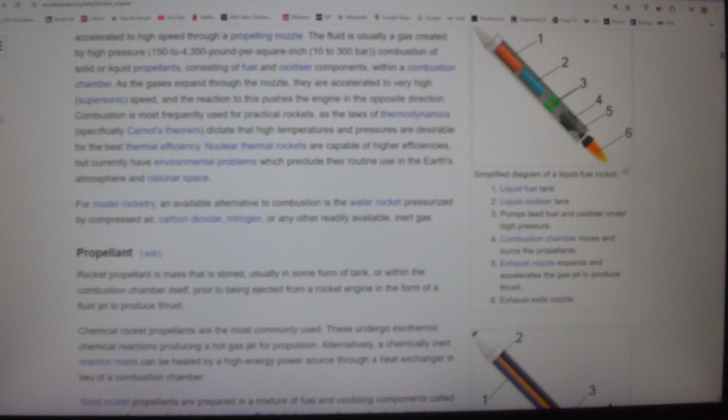Combustion is most frequently used for practical rockets, as the laws of thermodynamics, specifically Carnot's theorem, dictate that high temperatures and pressures are desirable for the best thermal efficiency. Nuclear thermal rockets are capable of higher efficiencies, but currently have environmental problems which preclude their routine use in the Earth's atmosphere and cislunar space. For model rocketry, an available alternative to combustion is the water rocket pressurized by compressed air, carbon dioxide, nitrogen, or any other readily available, inert gas.

Propellant. Rocket propellant is mass that is stored, usually in some form of tank, or within the combustion chamber itself, prior to being ejected from a rocket engine in the form of a fluid jet to produce thrust. Chemical rocket propellants are the most commonly used. These undergo exothermic chemical reactions producing a hot gas jet for propulsion. Alternatively, a chemically inert reaction mass can be heated by a high-energy power source through a heat exchanger in lieu of a combustion chamber.

Solid rocket propellants are prepared in a mixture of fuel and oxidizing components called grain, and the propellant storage casing effectively becomes the combustion chamber.

Injection. Liquid-fueled rockets force separate fuel and oxidizer components into the combustion chamber, where they mix and burn. Hybrid rocket engines use a combination of solid and liquid or gaseous propellants. Both liquid and hybrid rockets use injectors to introduce the propellant into the chamber.

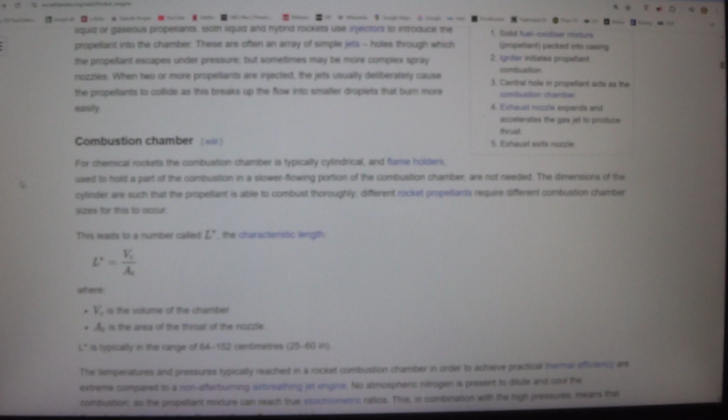Combustion chamber. For chemical rockets, the combustion chamber is typically cylindrical, and flame holders, used to hold a part of the combustion in a slower flowing portion of the combustion chamber, are not needed. The dimensions of the cylinder are such that the propellant is able to combust thoroughly. Different rocket propellants require different combustion chamber sizes for this to occur.

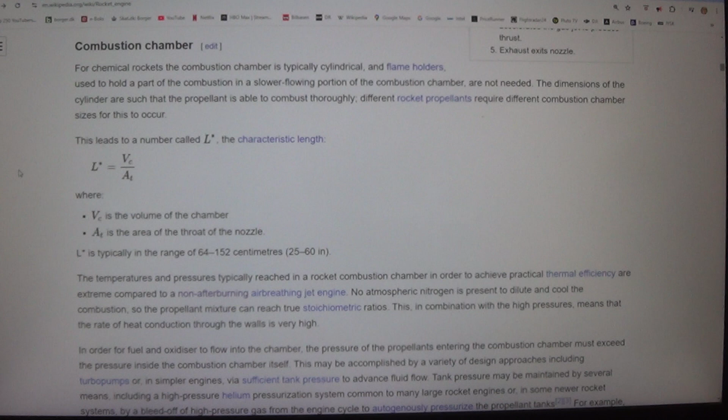This leads to a number called L*. The characteristic length L* = V_c / A_t, where V_c is the volume of the chamber and A_t is the area of the throat of the nozzle. L* is typically in the range of 64–152 centimeters (25–60 in).

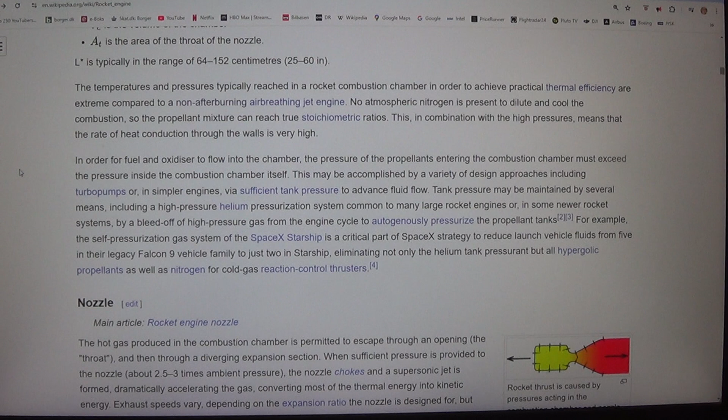The temperatures and pressures typically reached in a rocket combustion chamber in order to achieve practical thermal efficiency are extreme compared to a non-afterburning air-breathing jet engine. No atmospheric nitrogen is present to dilute and cool the combustion, so the propellant mixture can reach true stoichiometric ratios. This, in combination with the high pressures, means that the rate of heat conduction through the walls is very high.

In order for fuel and oxidizer to flow into the chamber, the pressure of the propellants entering the combustion chamber must exceed the pressure inside the combustion chamber itself. This may be accomplished by a variety of design approaches including turbo pumps or, in simpler engines, via sufficient tank pressure to advance fluid flow.

Tank pressure may be maintained by several means, including a high-pressure helium pressurization system common to many large rocket engines or, in some newer rocket systems, by a bleed-off of high-pressure gas from the engine cycle to autogenously pressurize the propellant tanks. For example, the self-pressurization gas system of the SpaceX Starship is a critical part of SpaceX's strategy to reduce launch vehicle fluids from 5 in their legacy Falcon 9 vehicle family to just 2 in Starship, eliminating not only the helium tank pressurant but all hypergolic propellants as well as nitrogen for cold gas reaction control thrusters.

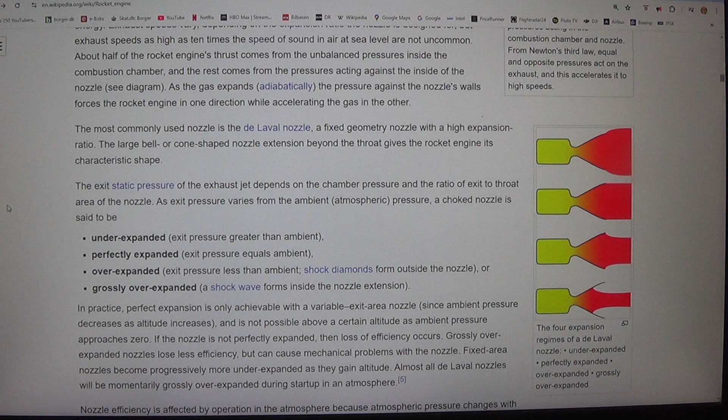The most commonly used nozzle is the de Laval nozzle, a fixed geometry nozzle with a high expansion ratio. The large bell or cone-shaped nozzle extension beyond the throat gives the rocket engine its characteristic shape. The exit static pressure of the exhaust jet depends on the chamber pressure and the ratio of exit to throat area of the nozzle.

As exit pressure varies from the ambient, atmospheric pressure, a choked nozzle is said to be: 1. Under-expanded, exit pressure greater than ambient. 2. Perfectly expanded, exit pressure equals ambient. 3. Over-expanded, exit pressure less than ambient, shock diamonds form outside the nozzle, or 4. Grossly over-expanded, a shock wave forms inside the nozzle extension.

In practice, perfect expansion is only achievable with a variable exit area nozzle, since ambient pressure decreases as altitude increases, and is not possible above a certain altitude as ambient pressure approaches zero. If the nozzle is not perfectly expanded, then loss of efficiency occurs.

Grossly over-expanded nozzles lose less efficiency, but can cause mechanical problems with the nozzle. Fixed area nozzles become progressively more under-expanded as they gain altitude. Almost all de Laval nozzles will be momentarily grossly over-expanded during startup in an atmosphere.

Nozzle efficiency is affected by operation in the atmosphere because atmospheric pressure changes with altitude, but due to the supersonic speeds of the gas exiting from a rocket engine, the pressure of the jet may be either below or above ambient, and equilibrium between the two is not reached at all altitudes. See diagram. Back pressure and optimal expansion.

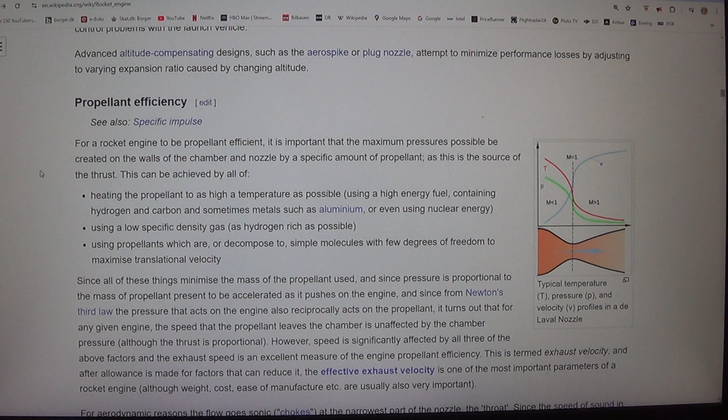Propellant efficiency. See also, specific impulse. For a rocket engine to be propellant efficient, it is important that the maximum pressures possible be created on the walls of the chamber and nozzle by a specific amount of propellant, as this is the source of the thrust. This can be achieved by all of:

1. Heating the propellant to as high a temperature as possible, using a high-energy fuel, containing hydrogen and carbon and sometimes metals such as aluminium, or even using nuclear energy. 2. Using a low specific density gas, as hydrogen-rich as possible. 3. Using propellants which are, or decompose to, simple molecules with few degrees of freedom to maximize translational velocity.

Since all of these things minimize the mass of the propellant used, and since pressure is proportional to the mass of propellant present to be accelerated as it pushes on the engine, and since from Newton's third law the pressure that acts on the engine also reciprocally acts on the propellant, it turns out that for any given engine, the speed that the propellant leaves the chamber is unaffected by the chamber pressure, although the thrust is proportional.

However, speed is significantly affected by all three of the above factors, and the exhaust speed is an excellent measure of the engine propellant efficiency. This is termed exhaust velocity, and after allowance is made for factors that can reduce it, the effective exhaust velocity is one of the most important parameters of a rocket engine, although weight, cost, ease of manufacture etc.

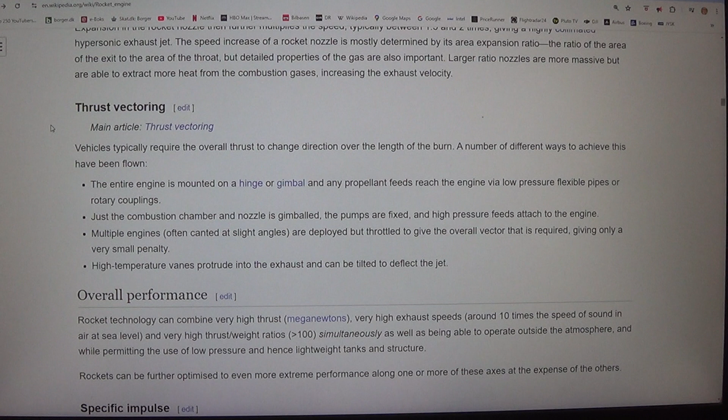1. The entire engine is mounted on a hinge or gimbal and any propellant feeds reach the engine via low-pressure flexible pipes or rotary couplings. 2. Just the combustion chamber and nozzle is gimballed, the pumps are fixed, and high-pressure feeds attached to the engine. 3. Multiple engines, often canted at slight angles, are deployed but throttled to give the overall vector that is required, giving only a very small penalty. 4. High-temperature vanes protrude into the exhaust and can be tilted to deflect the jet.

Overall performance. Rocket technology can combine very high thrust, meganewtons, very high exhaust speeds, around 10 times the speed of sound in air at sea level, and very high thrust/weight ratios, greater than 100, simultaneously, as well as being able to operate outside the atmosphere, and while permitting the use of low pressure and hence lightweight tanks and structure. Rockets can be further optimized to even more extreme performance along one or more of these axes at the expense of the others.

Specific impulse. Main article: specific impulse. The most important metric for the efficiency of a rocket engine is impulse per unit of propellant. This is called specific impulse, usually written I_sp. This is either measured as a speed, the effective exhaust velocity, v_e, in meters/second or feet/s, or as a time, seconds. For example, if an engine producing 100 pounds of thrust runs for 320 seconds and burns 100 pounds of propellant, then the specific impulse is 320 seconds.

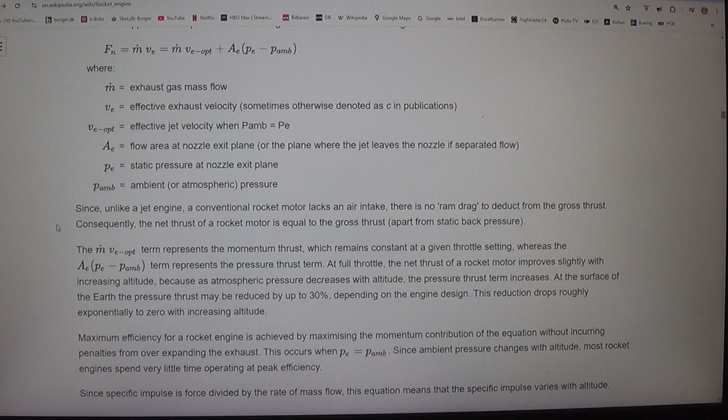F_n = ṁ v_e = ṁ v_e-opt + A_e (p_e − p_amb), where ṁ = exhaust gas mass flow, v_e = effective exhaust velocity, sometimes otherwise denoted as c in publications, v_e-opt = effective jet velocity when p_amb = p_e, A_e = flow area at nozzle exit plane, or the plane where the jet leaves the nozzle if separated flow, p_e = static pressure at nozzle exit plane, p_amb = ambient, or atmospheric, pressure.

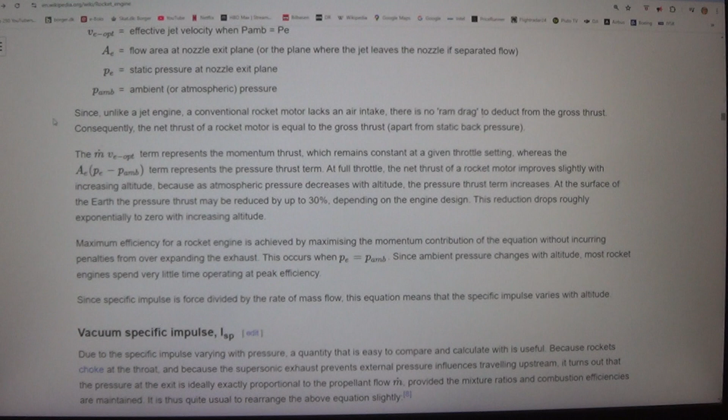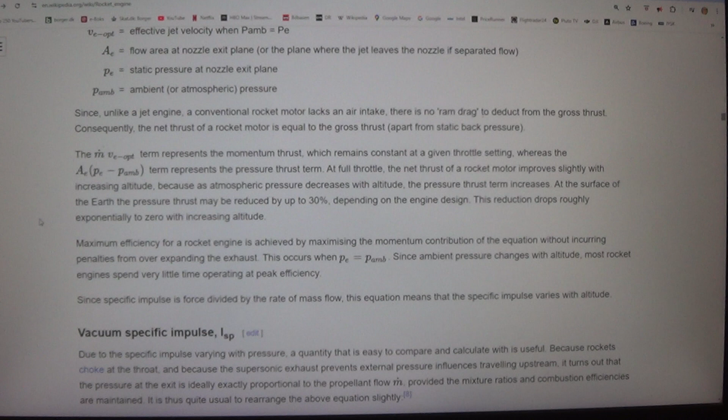Since, unlike a jet engine, a conventional rocket motor lacks an air intake, there is no ram drag to deduct from the gross thrust. Consequently, the net thrust of the rocket motor is equal to the gross thrust, apart from static back pressure. The ṁ v_e-opt term represents the momentum thrust, which remains constant at a given throttle setting, whereas the A_e (p_e − p_amb) term represents the pressure thrust term.

At full throttle, the net thrust of the rocket motor improves slightly with increasing altitude, because as atmospheric pressure decreases with altitude, the pressure thrust term increases. At the surface of the Earth, the pressure thrust may be reduced by up to 30%, depending on the engine design.

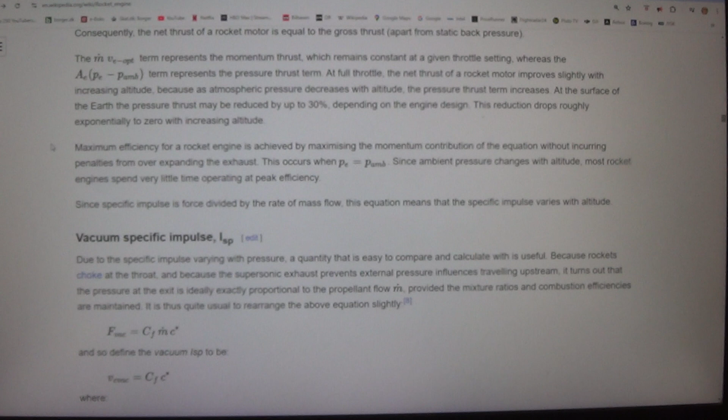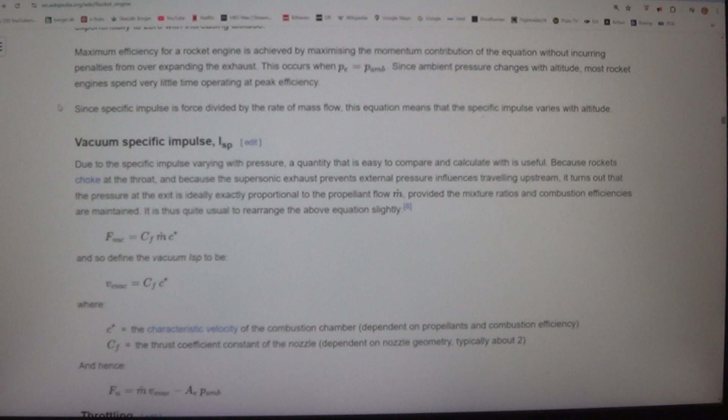This reduction drops roughly exponentially to zero with increasing altitude. Maximum efficiency for a rocket engine is achieved by maximizing the momentum contribution of the equation without incurring penalties from over-expanding the exhaust. This occurs when P_e equals P_amb. Since ambient pressure changes with altitude, most rocket engines spend very little time operating at peak efficiency. Since specific impulse is force divided by the rate of mass flow, this equation means that the specific impulse varies with altitude.

Vacuum specific impulse, Isp. Due to the specific impulse varying with pressure, a quantity that is easy to compare and calculate with is useful. Because rockets choke at the throat, and because the supersonic exhaust prevents external pressure influences traveling upstream, it turns out that the pressure at the exit is ideally exactly proportional to the propellant flow, provided the mixture ratios and combustion efficiencies are maintained. It is thus quite usual to rearrange the above equation slightly.

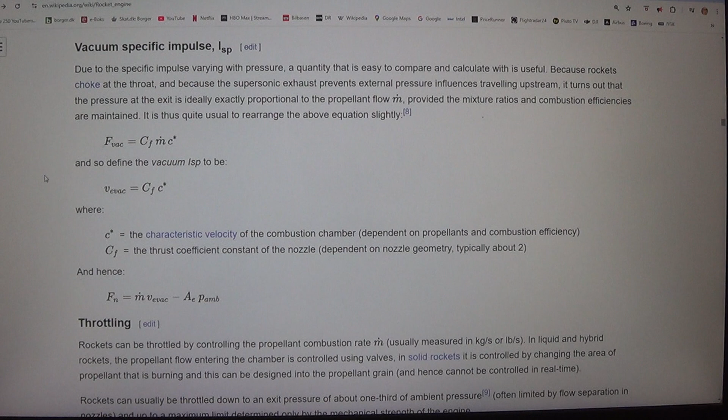F_vac equals C_F times m-dot times C*. And so define the vacuum Isp to be V_e,vac equals C_F times C*, where C* equals the characteristic velocity of the combustion chamber, dependent on propellants and combustion efficiency. C_F equals the thrust coefficient constant of the nozzle, dependent on nozzle geometry, typically about 2. And hence, F_n equals m-dot times V_e,vac minus A_e times P_amb.

Throttling. Rockets can be throttled by controlling the propellant combustion rate, m-dot, usually measured in kg/s or lb/s. In liquid and hybrid rockets, the propellant flow entering the chamber is controlled using valves. In solid rockets it is controlled by changing the area of propellant that is burning, and this can be designed into the propellant grain, and hence cannot be controlled in real time.

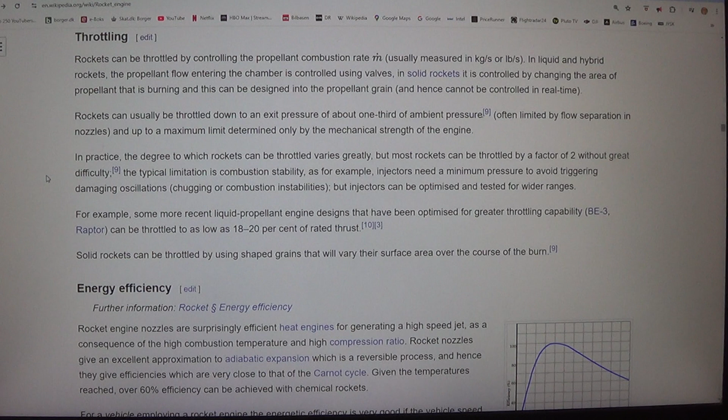Rockets can usually be throttled down to an exit pressure of about 1/3 of ambient pressure, often limited by flow separation in nozzles, and up to a maximum limit determined only by the mechanical strength of the engine. In practice, the degree to which rockets can be throttled varies greatly, but most rockets can be throttled by a factor of 2 without great difficulty. The typical limitation is combustion stability, as for example, injectors need a minimum pressure to avoid triggering damaging oscillations, chugging or combustion instabilities, but injectors can be optimized and tested for wider ranges.

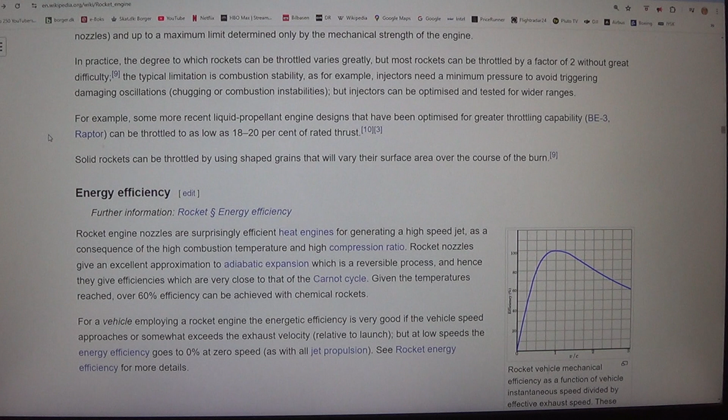For example, some more recent liquid propellant engine designs that have been optimized for greater throttling capability, BE-3, Raptor, can be throttled to as low as 18–20% of rated thrust. Solid rockets can be throttled by using shaped grains that will vary their surface area over the course of the burn.

Energy efficiency. Further information: rocket energy efficiency. Rocket engine nozzles are surprisingly efficient heat engines for generating a high-speed jet, as a consequence of the high combustion temperature and high compression ratio. Rocket nozzles give an excellent approximation to adiabatic expansion, which is a reversible process, and hence they give efficiencies which are very close to that of the Carnot cycle. Given the temperatures reached, over 60% efficiency can be achieved with chemical rockets.

For a vehicle employing a rocket engine, the energetic efficiency is very good if the vehicle speed approaches or somewhat exceeds the exhaust velocity, relative to launch, but at low speeds the energy efficiency goes to 0% at zero speed, as with all jet propulsion. See rocket energy efficiency for more details.

Thrust-to-weight ratio. Main article: thrust-to-weight ratio. Rockets, of all the jet engines, indeed of essentially all engines, have the highest thrust-to-weight ratio. This is especially true for liquid-fueled rocket engines. This high performance is due to the small volume of pressure vessels that make up the engine, the pumps, pipes and combustion chambers involved. The lack of inlet duct and the use of dense liquid propellant allows the pressurization system to be small and lightweight, whereas duct engines have to deal with air which has around 3 orders of magnitude